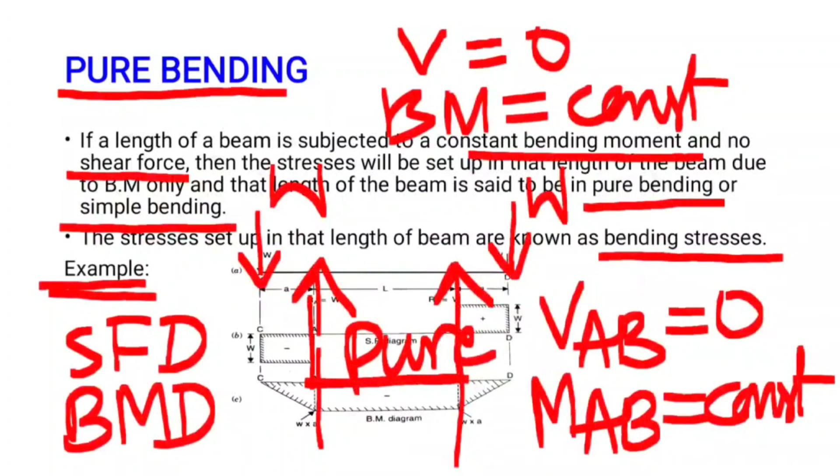in the portion AB, the shear force is 0, and for the same portion AB under the same loading condition, the bending moment is constant. So we say that the length of portion AB is under pure bending condition or simple bending condition. Next we see assumptions.

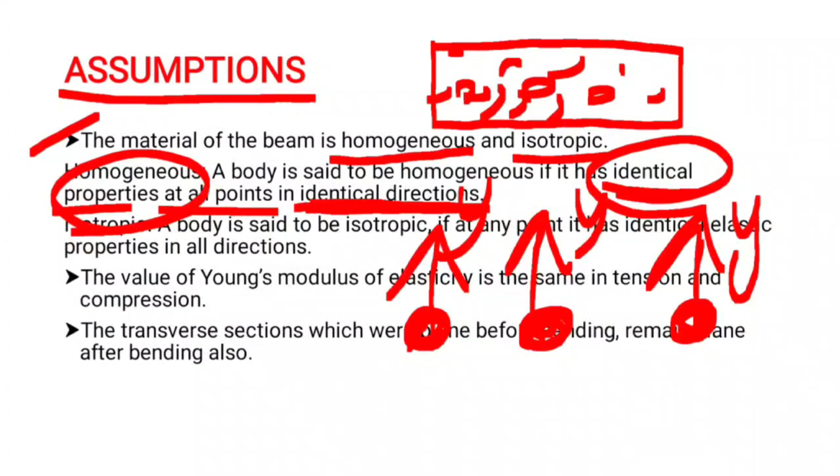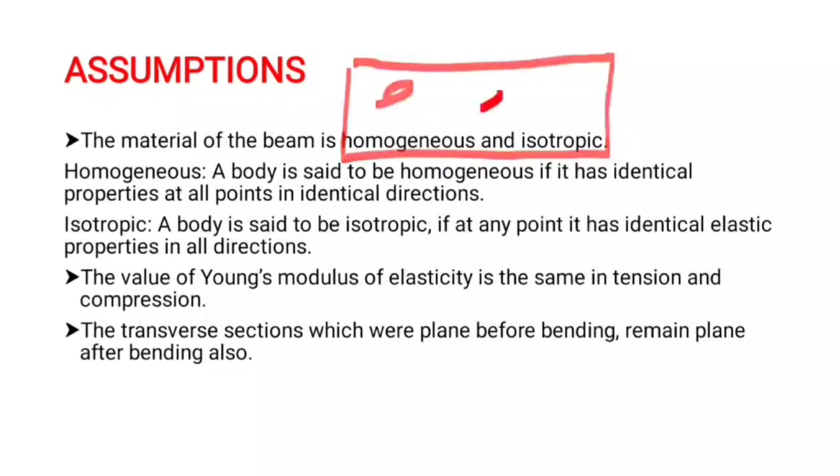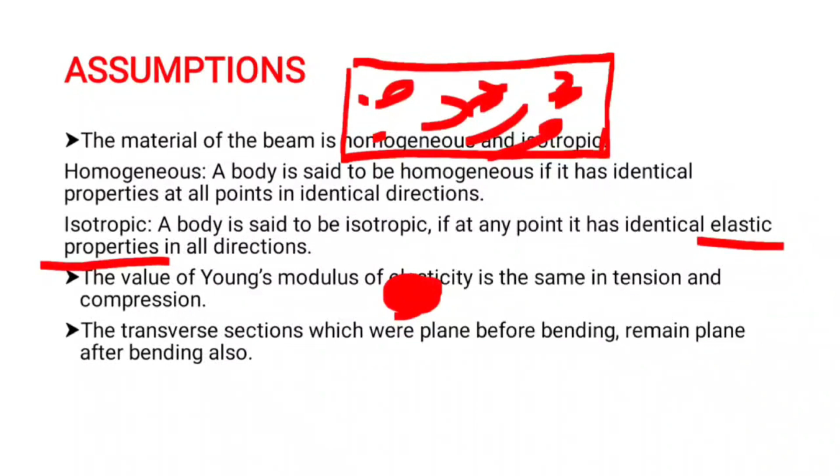A body is said to be isotropic when: this is a body with lots of points. At any point, if the elastic properties in all directions - x direction, y direction, and z direction - are the same, then the body is said to be isotropic.

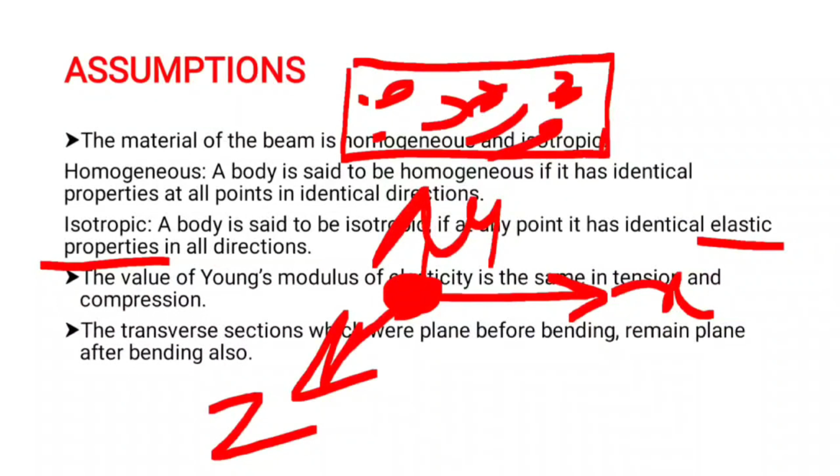The next assumption is the value of Young's modulus of elasticity is same in tension and in compression. That is, E tension, Young's modulus of elasticity in tension, is equal to Young's modulus of elasticity in compression.

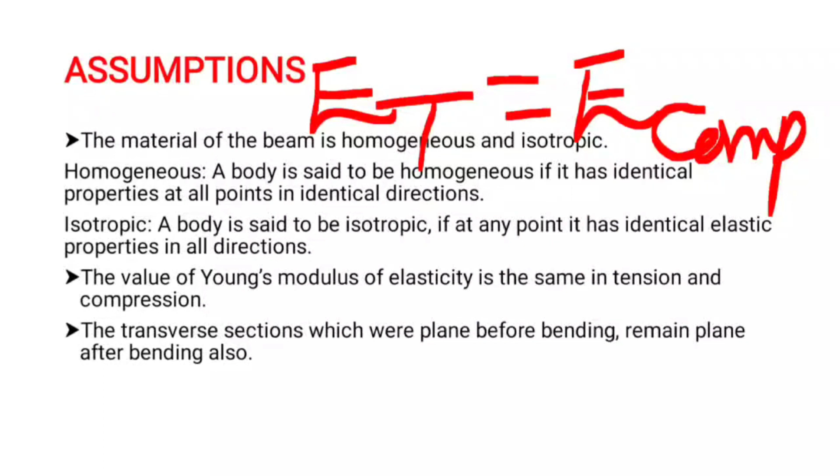The transverse section which were plane before bending remain plane after bending. For better understanding of this third assumption, we draw a figure. This is the beam before bending condition, and this is the transverse section, named as neutral axis.

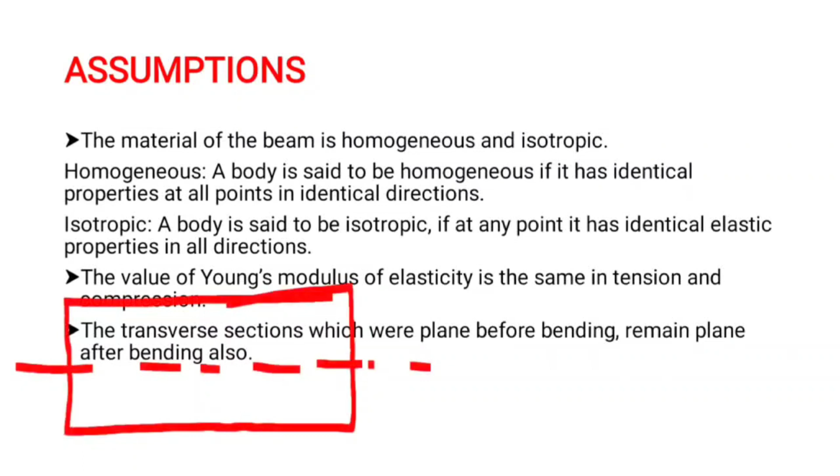That neutral axis is plane before bending and remains plane after bending also. After bending, the topmost fibers undergo compression and the bottommost fibers undergo tension, but the neutral axis remains in plane condition only.

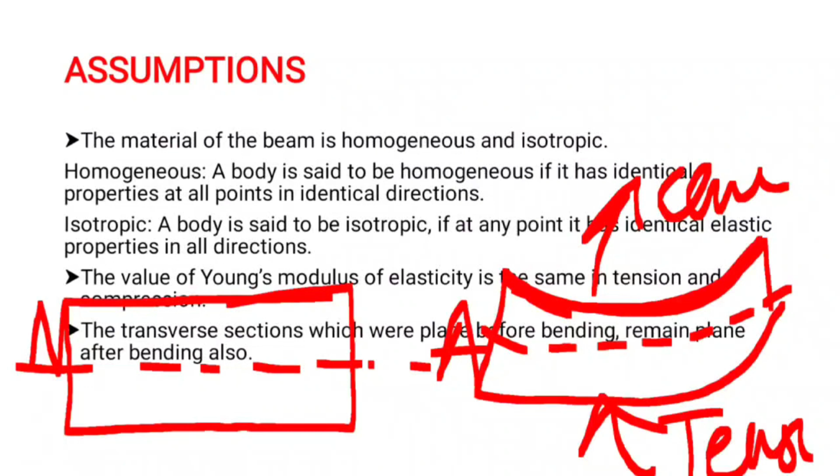The next assumption is that the beam is initially straight.

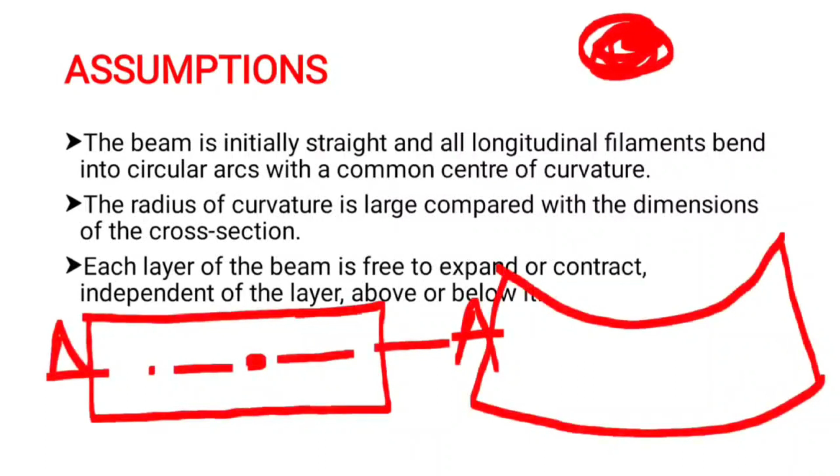This is the neutral axis. All longitudinal filaments bend into circular arcs like this, bending into a circular arc with a common center of curvature. This is the common center of curvature. The radius will be r, and we consider the radius from the neutral axis.

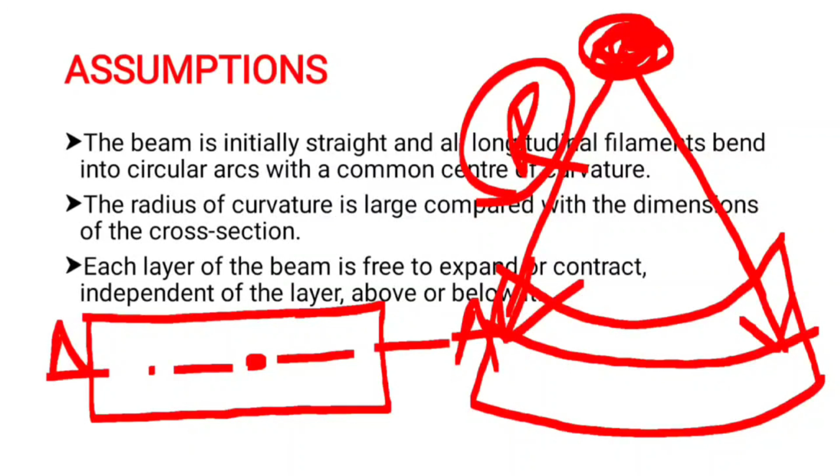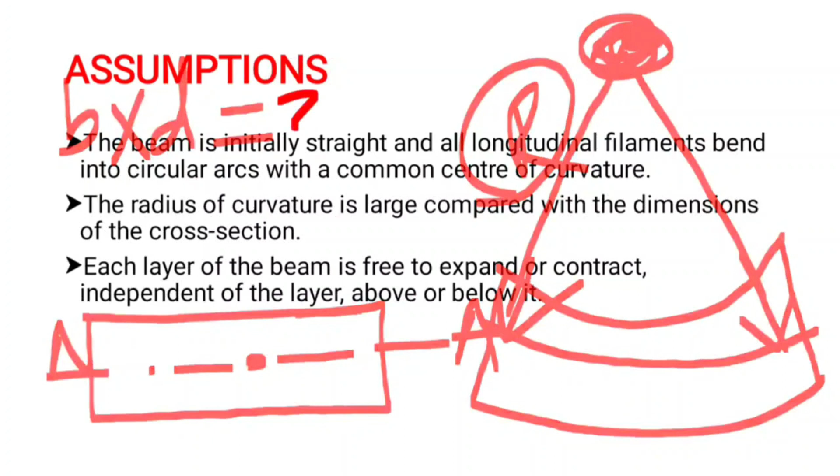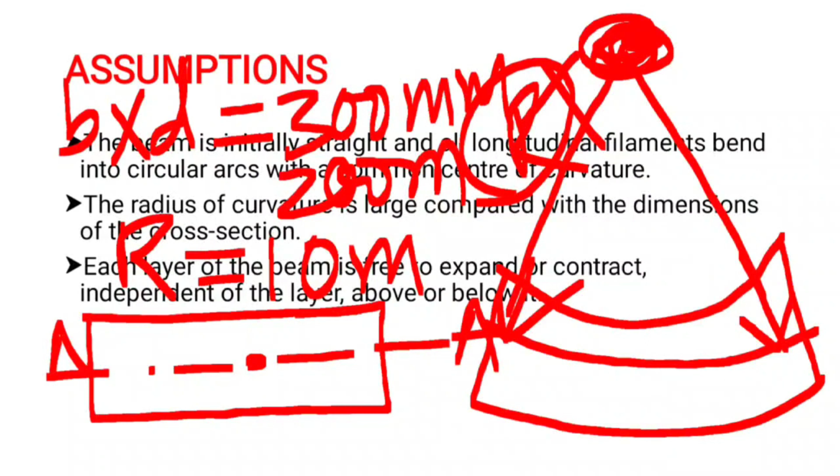The next assumption is that the radius of curvature is large compared with the dimensions of the cross section. Let's say the beam dimensions B into D equals 300mm by 200mm, but the radius will be 10 meters. Comparing the radius with the dimensions of the beam, the radius is very large. That is the assumption made in bending theory.

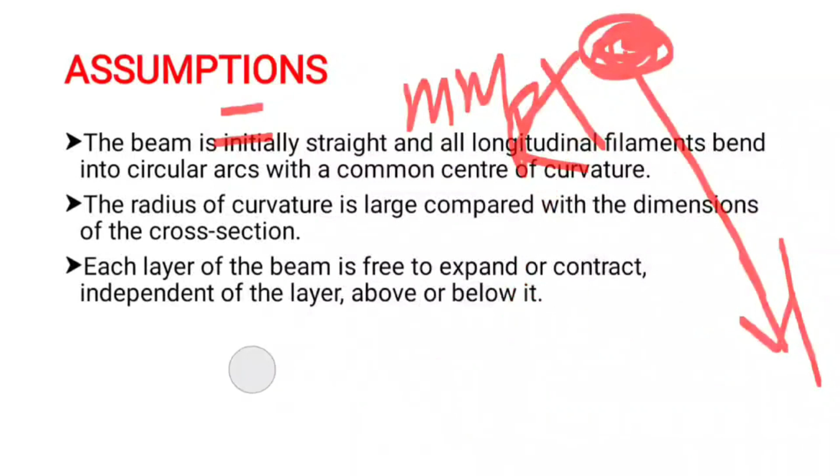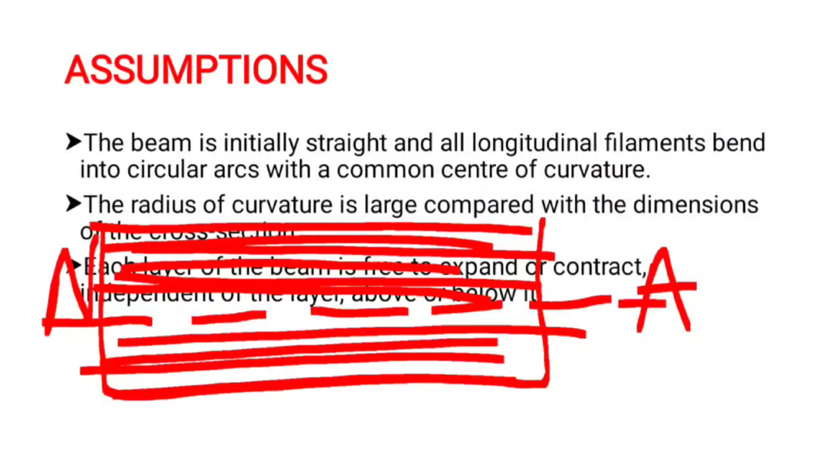The last assumption is that each layer of the beam is free to expand or contract independent of the layer above or below it. Let's say this is a beam, this is a transverse section, that is the neutral axis. The layers above and below the neutral axis are free to expand or contract. They do not depend on the layers; they are independent of the layer above or below it. This is the final assumption made in bending theory.

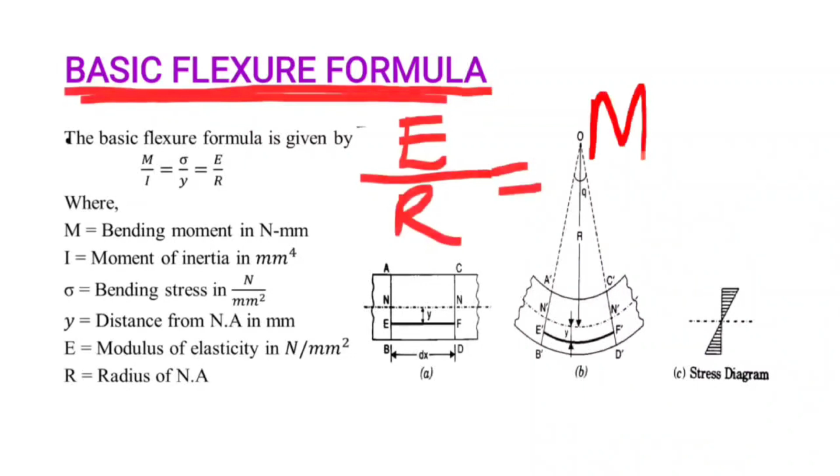Next we see the basic flexure formula. This is the expression for bending theory. The flexure formula is given by M/I equals sigma/y equals E/R. In some textbooks, they give E/R equals M/I equals F/Y.

Based on the diagrams provided here, this is the beam before bending condition, this is after bending condition, and the stress distribution in the beam section will be like this. Based on the figures provided here, the derivation is done, but the derivation is not needed here. We just need to remember the formula.

A simple trick is given here to remember the formula. For remembering the bending equation, we follow a phrase: E/R equals M/I equals F/y. In some textbooks F is given, in some textbooks sigma is given - anything given is nothing but the bending stress. For this, I give a simple trick: E by R, M by I, F by y. How to remember is - Elizabeth Rani, may I follow you? Based on this phrase, we remember the formula: Elizabeth Rani, may I follow you?

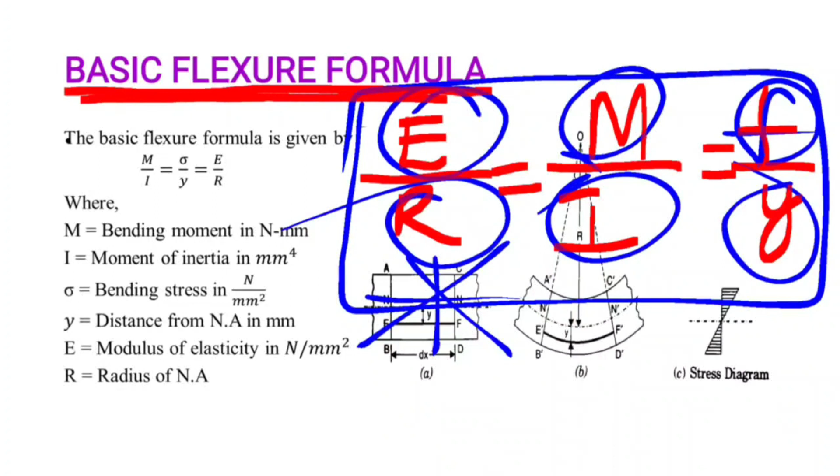Here the term M is bending moment, I is moment of inertia, sigma is bending stress, y is distance from the neutral axis. We can observe here, this is the strip, this is the neutral axis. From the neutral axis we measure the distance, that is y. E is modulus of elasticity in Newton per mm square, R is the radius, this is the radius.

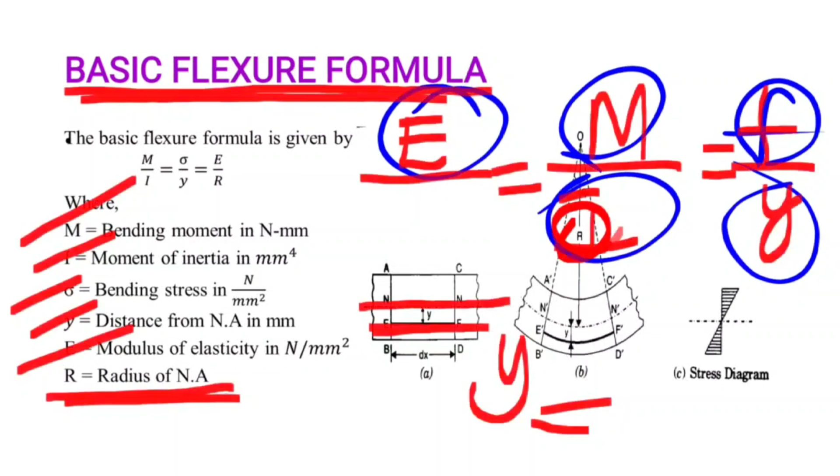Next we see bending stresses.

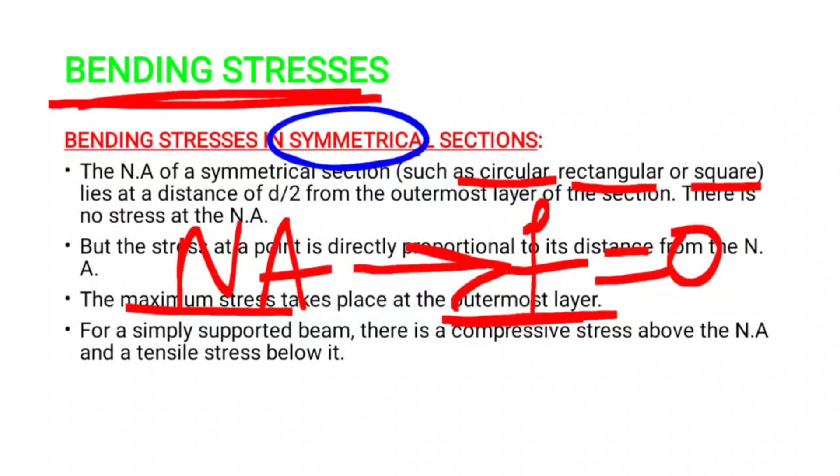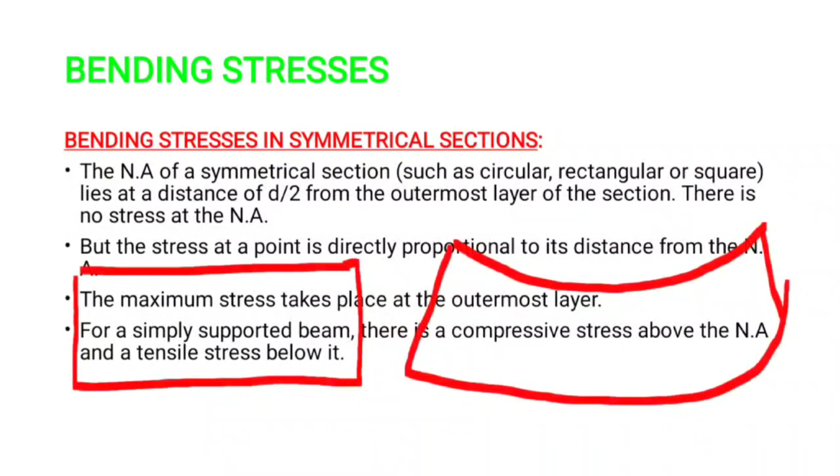Why? Because we see the bending phenomenon - this is before bending, this is after bending. The topmost fibers undergo compression, the bottommost fibers undergo tension. That's why at the top compressive stresses are developed and at the bottom tensile stresses are developed.

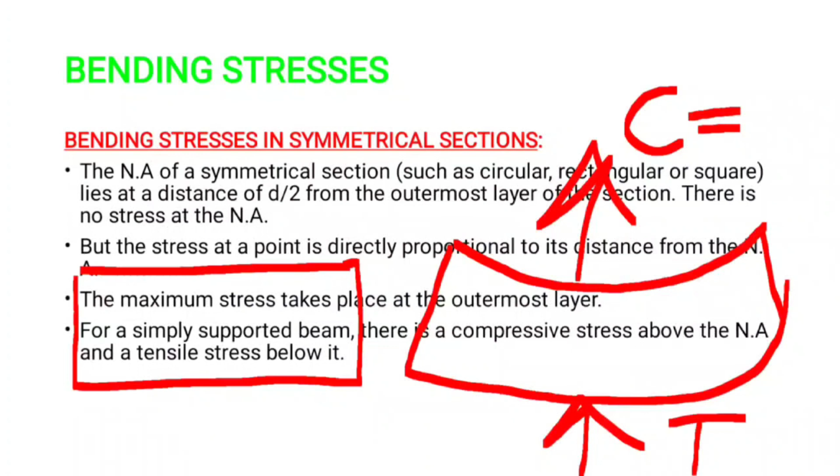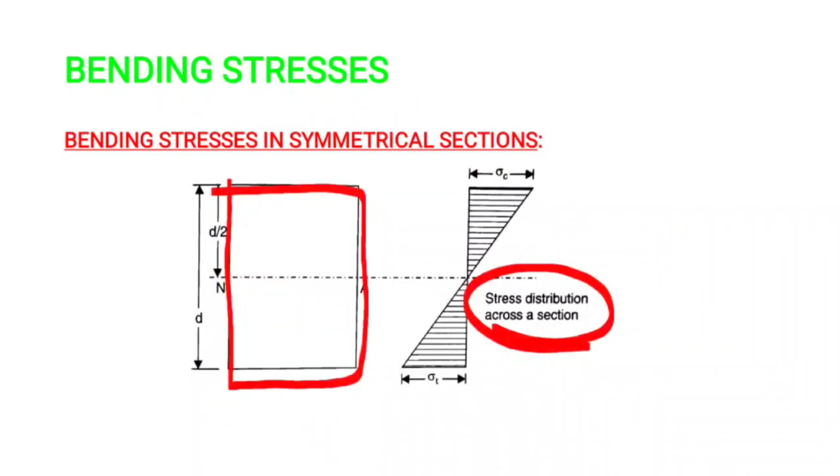Let's see, this is a simply supported beam. We draw the stress distribution - this is compression, this is tension.

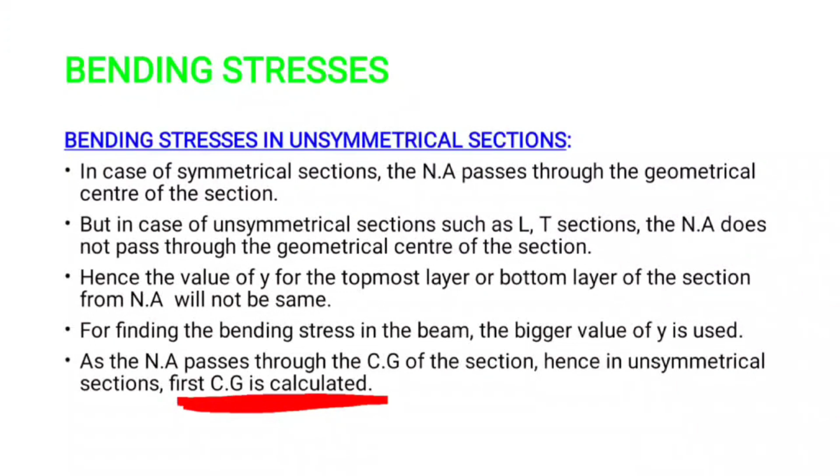Let's see what section modulus is. Section modulus is defined as the ratio of moment of inertia of a section about the neutral axis to the distance of the outermost layer from the neutral axis. It is denoted by the symbol Z.

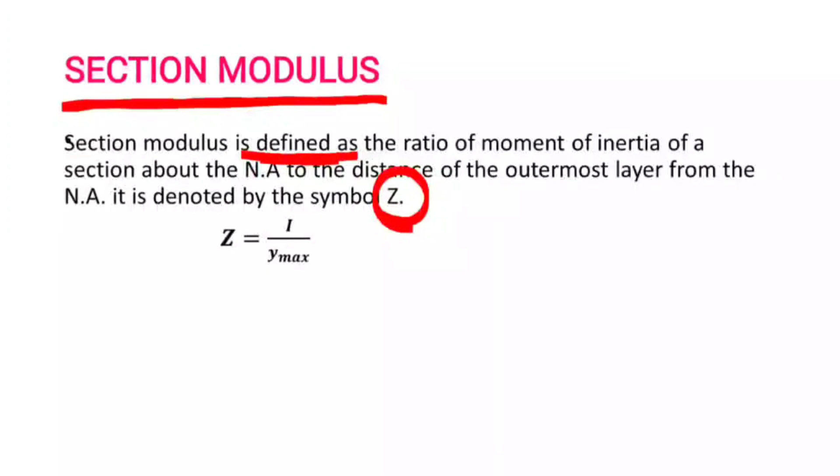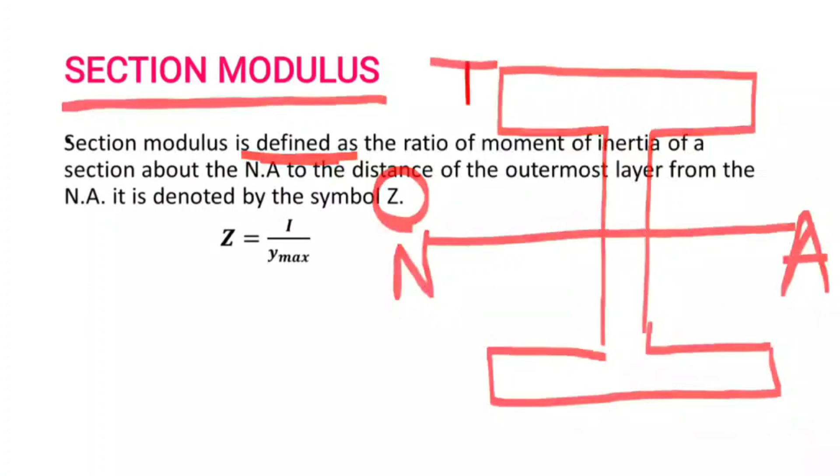Let's take an I section. Suppose it is a symmetrical I section. For the symmetrical I section, the neutral axis passes through the center of gravity only. This is d/2, and this d/2 is y max.

For the I section, first we calculate the moment of inertia. We already know how to calculate moment of inertia, as we saw in the last classes. Y max is d/2. To find Z, we divide I by y max, and that gives us the section modulus value.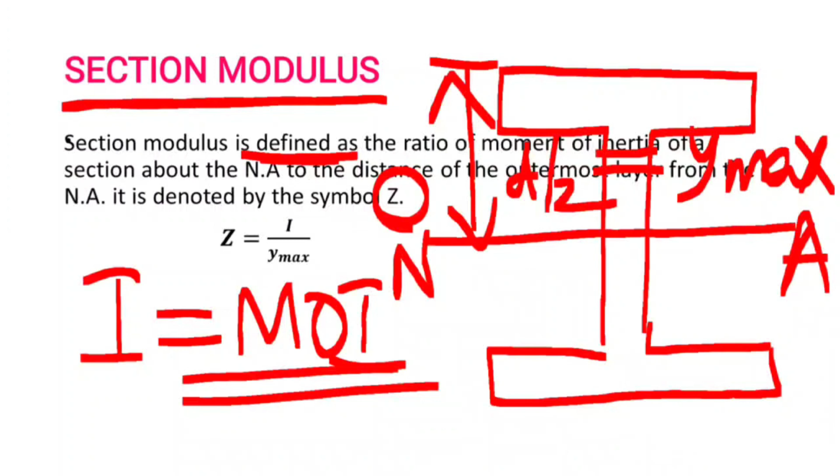When calculating moment of inertia for a rectangular section, the formula is BD³/12. Y max is d/2. So BD³/12 divided by d/2 gives us BD²/6. This is the section modulus for the rectangular section.

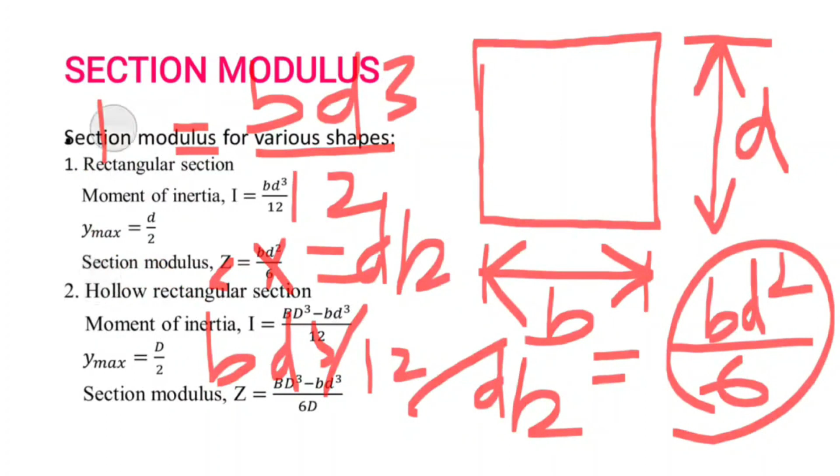Similarly, for the hollow rectangular section, we calculate the section modulus. The I value will be BD³ minus bd³, all divided by 12 — this is capital, and this is hollow. Outermost dimensions are capital B and capital D, and the inner dimensions are small b and small d. We do not consider the hollow portion; we consider only the solid portion, so moment of inertia is calculated for the solid portion with the hollow portion removed. Moment of inertia will be BD³ minus bd³ divided by 12. Y max will be capital D/2. Section modulus will be I/y max, giving us BD³ minus bd³ divided by 6D, which is the section modulus for the hollow rectangular section.

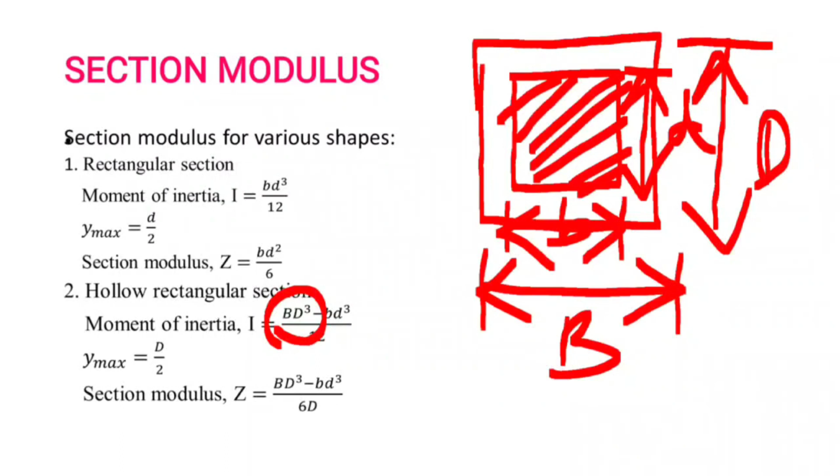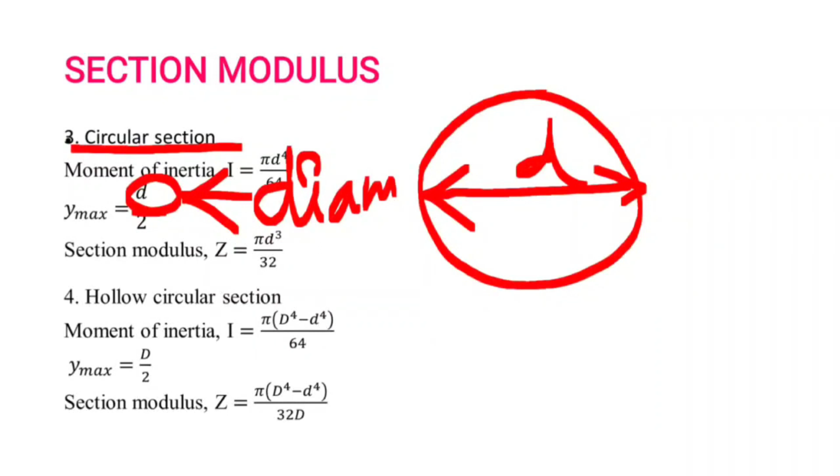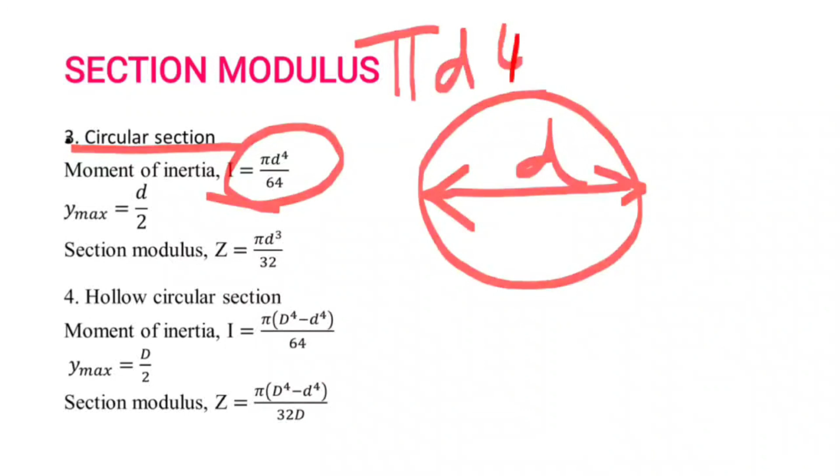Next we see the circular section. In the rectangular section, D refers to depth; in this case, D refers to diameter. For the circular section, D is the diameter of the circle. The moment of inertia is pi D⁴/64. Y max will be D/2. Section modulus Z is I/y max, that is pi D⁴ divided by 64, divided by D/2, which gives us pi D³/32 as the section modulus for the circular section.

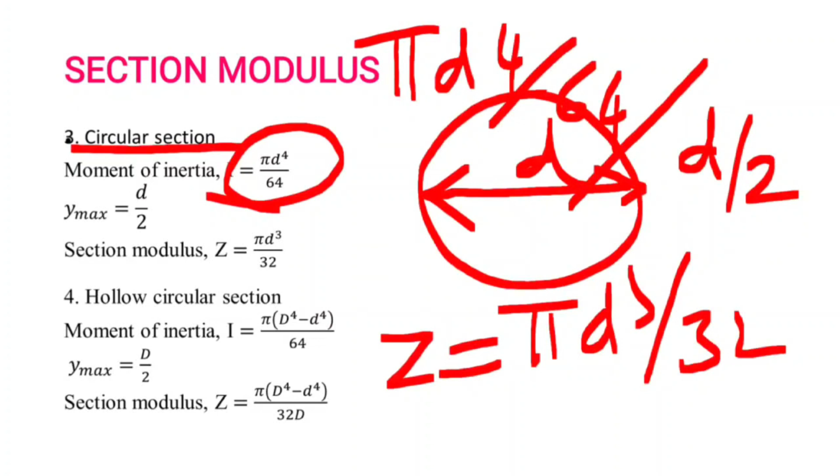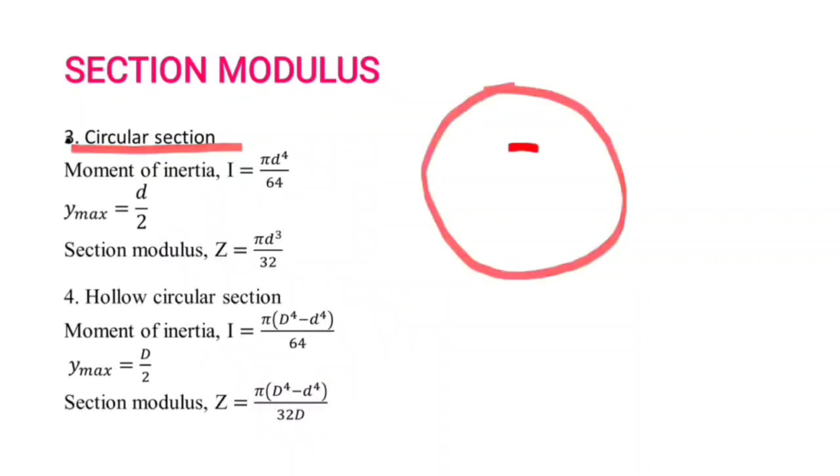In case of the hollow circular section, in the same manner as the hollow rectangular section, we calculate it. This is one circle, and this is another circle. The smaller diameter is small d, the larger diameter is capital D. The moment of inertia will be pi times capital D to the power 4 minus small d to the power 4, divided by 64. Y max will be the large diameter, capital D, divided by 2. The section modulus will be Z equals I by y max, giving pi times D⁴ minus d⁴ divided by 32D.

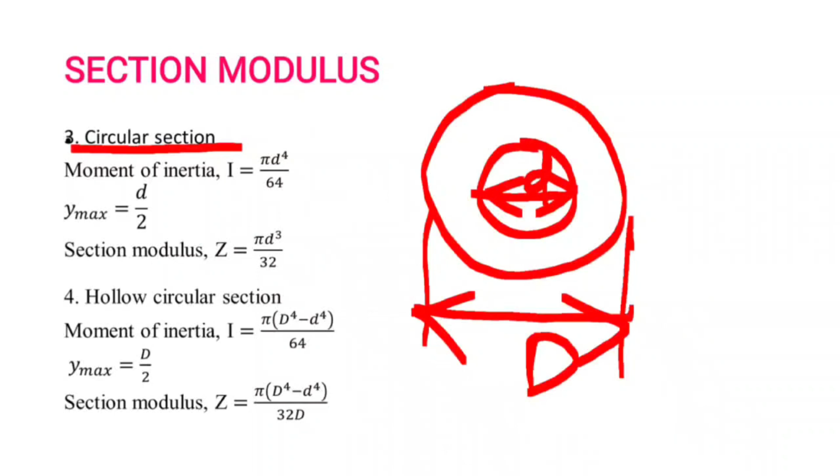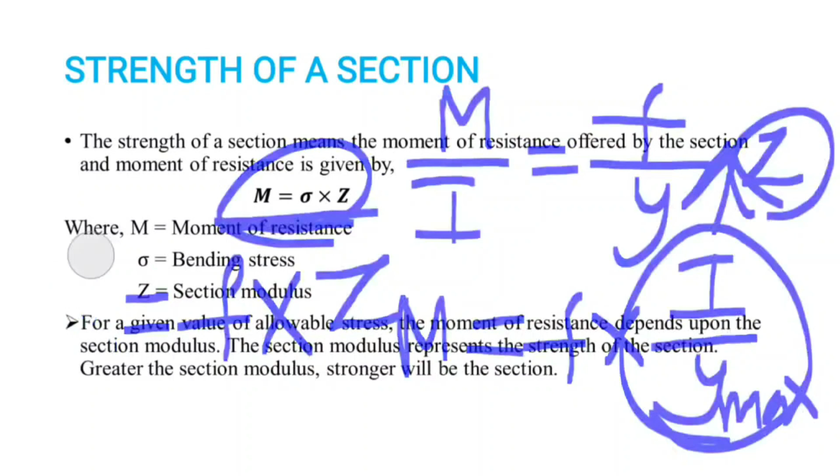Next we see strength of a section. Strength of section relates to moment of inertia and moment of resistance — the moment of resistance offered by the section. The moment of resistance is given by the equation M/I equals f/y, so M equals f times I/y. If y is maximum, then I/y is called the section modulus. Then the moment of resistance is given by bending stress times section modulus.

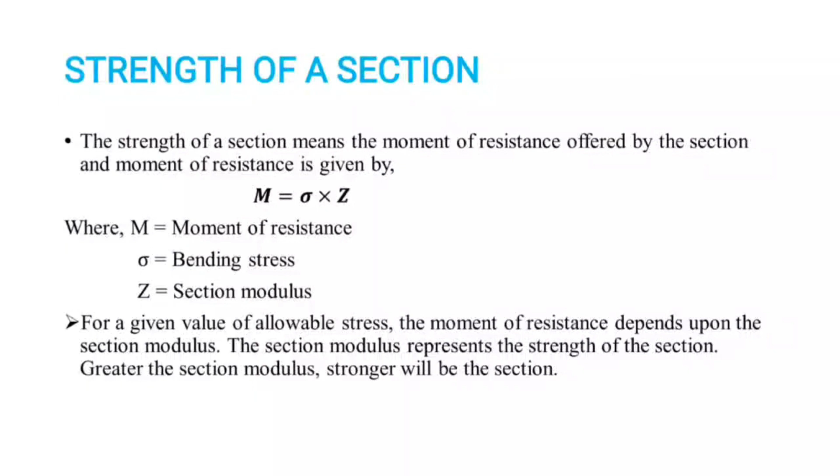This is the formula: M is moment of resistance, sigma or f is bending stress, Z is section modulus. For a given value of allowable stress, the moment of resistance depends on the section modulus. The section modulus represents the strength of the section — the greater the section modulus, the stronger the section. This is directly proportional, so if Z is more, the strength, that is moment of resistance, is more.

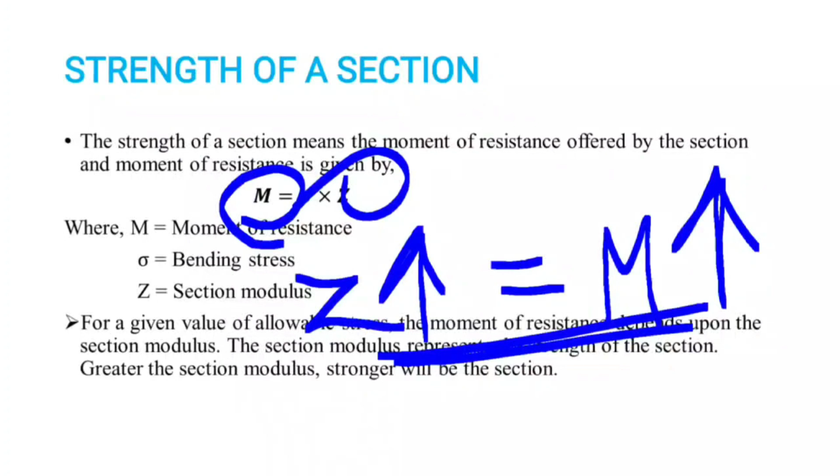Next we see shear stress. Shear stress produced in a beam which is subjected to shear force is known as the shear stresses.

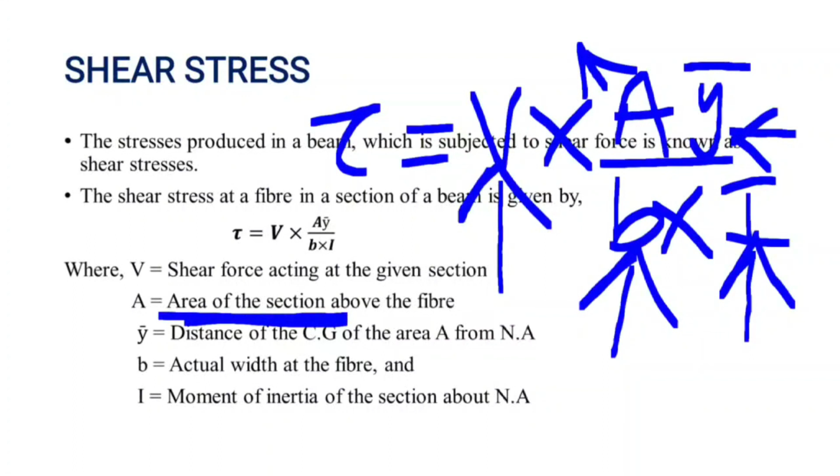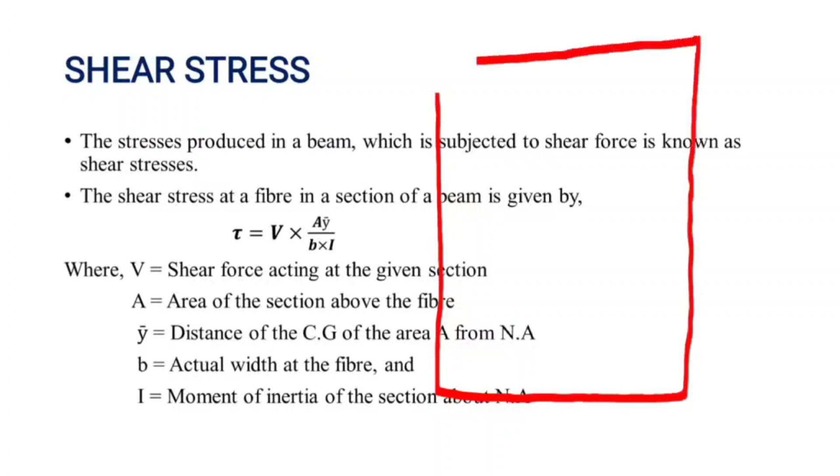Let's see what area of the section above the fiber means. Let's say this is a rectangular section. This is the rectangular section. This is the center of gravity. I consider this portion, then the area of the section above the fiber - this is the area we consider.

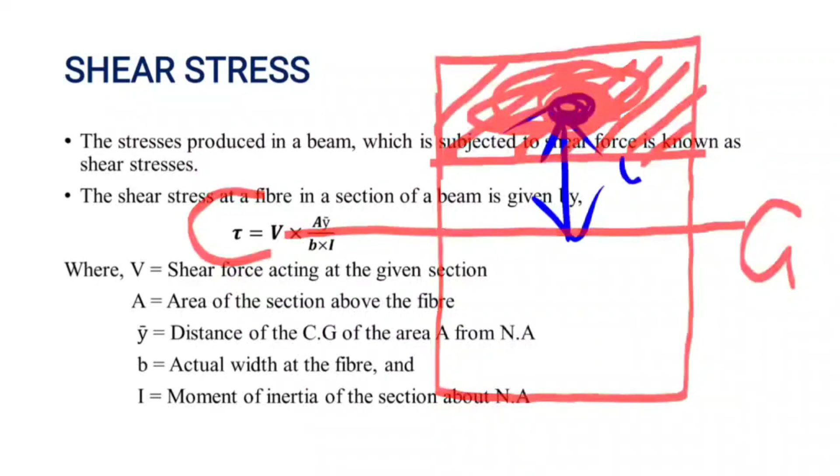Y bar is nothing but from this portion the centroid acting. From this center of gravity to the hatched area center of gravity, we calculate y bar. This is the y bar. This is the basic formula for shear stress.

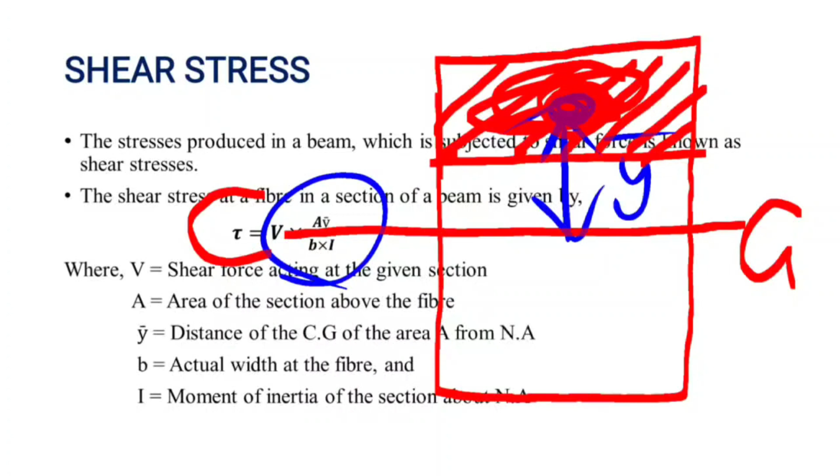We see some common sections. First we see shear stress distribution for rectangular section. The rectangular section, the shear stress will be parabolic. This is parabola, and the shear stress formula is given by tau is equals to V by 2I, d square by 4 minus y square. This is the formula for rectangular section.

The basic formula is tau is equals to V into A y bar by B into I. This is the basic formula. From that formula we derived for rectangular sections. D is the depth of the beam we see, and y is the distance of fiber from neutral axis or center of gravity.

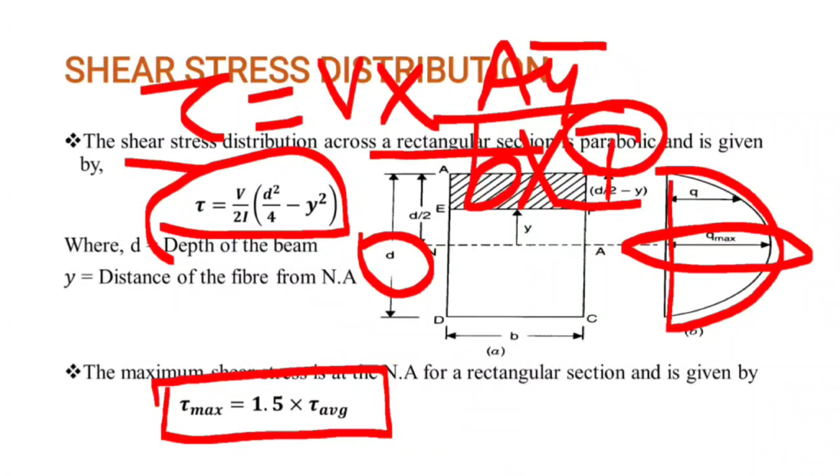If you see, for the circular section, this is a circle. I consider a strip, that is EF, a section EF. This is Y. The formula for shear stress is V by 3I, capital R square minus Y square. Capital R is nothing but the radius of the circle. Y is the distance from neutral axis. The distribution will be parabolic.

Circular section is parabola only. The maximum is at the neutral axis only. For this case, the maximum shear stress is given by tau max is equals to 4/3 of tau average. That is, maximum shear stress is 4/3 times of average shear stress.

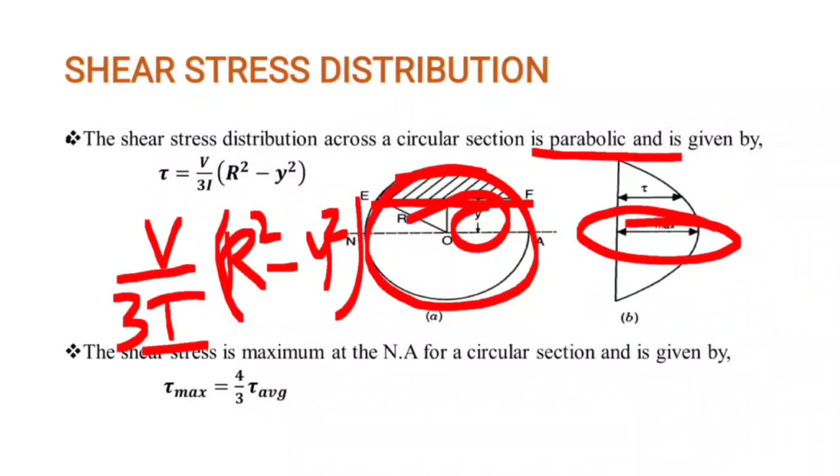The next one is for I section. We see this is the I section. For the I section, the distribution is parabola only. But at the junctions of web and flange, the shear stress changes abruptly.

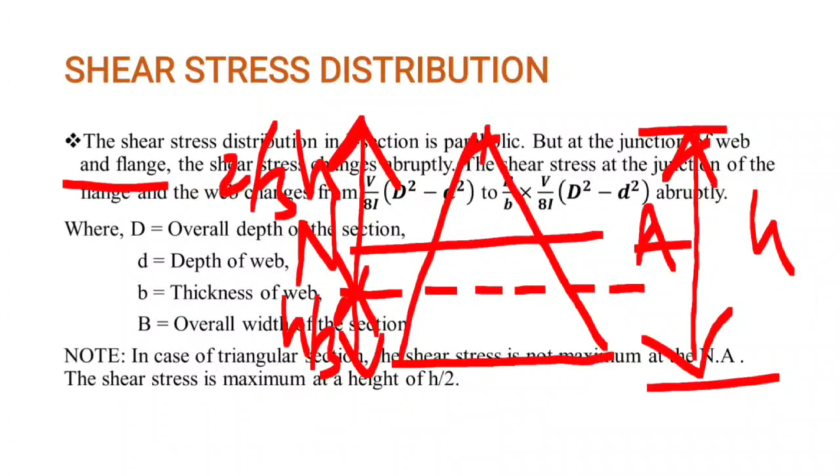Okay, this is the shear stress distribution in I sections. For the flange and web junctions, the shear stress changes abruptly.

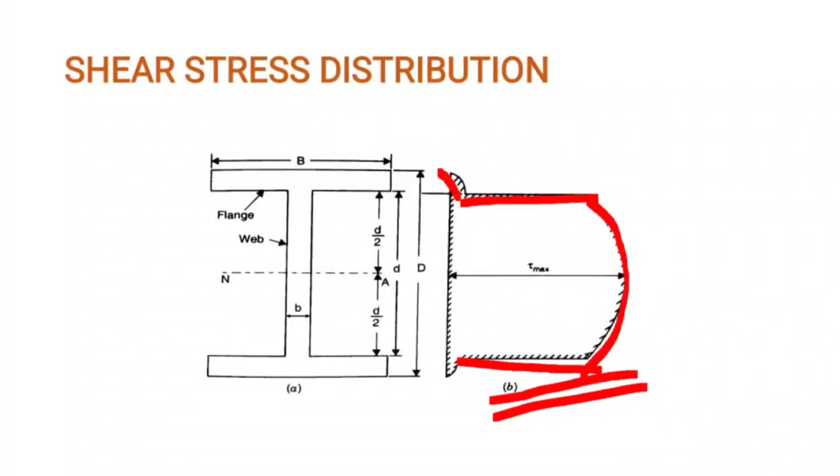I hope this class is helpful for your preparation. In the next class, we see another amazing topic. Thank you.